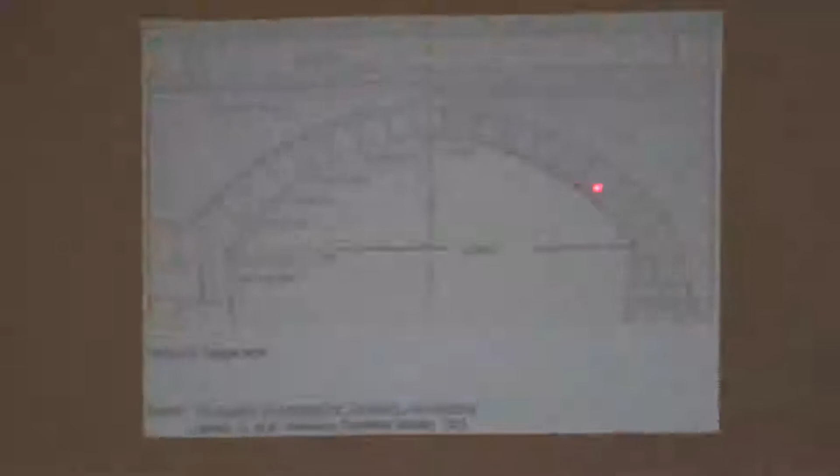And if you look here, you can see that each of these little lines represents the break between two stones in this arch. And you can see that they're pretty much perpendicular to the face underneath. So each one of these allows forces to be transmitted perpendicular to that face along the axis of the arch, and as a result, all the weight that is on here would be pressing down here, out this way, or maybe even this way, depending on the shape of the arch.

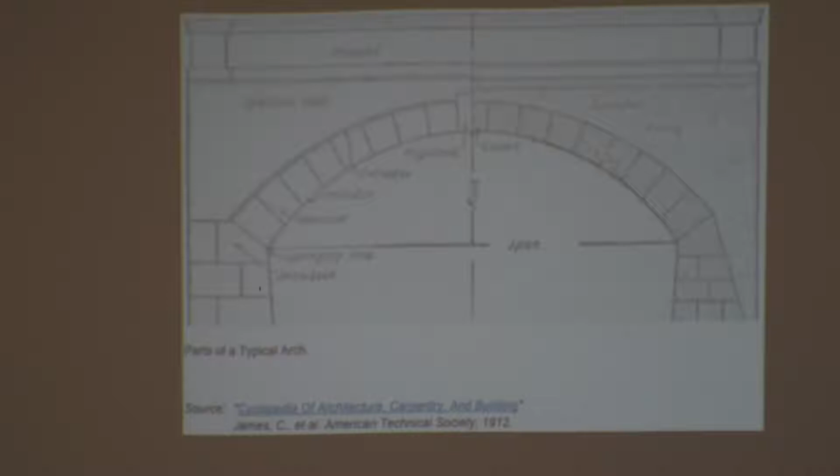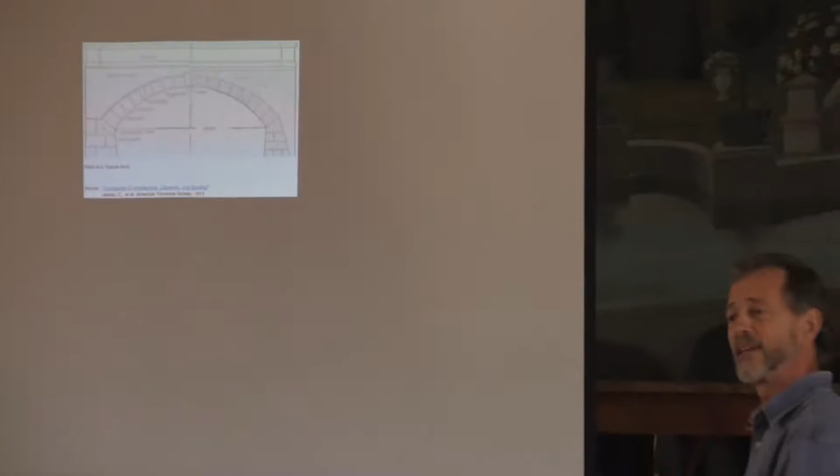The Romans built fully semicircular arches, and the resultant of the forces on those arches push down more than push out. But subsequently, people were able to make the arches shallower by increasing the support out here. So if you have enough mass out here, you can actually make this a shallower arch. And that's exactly how the Follett arches are built. So, any questions on that so far? I'm only going to give you a very brief piece of information here. If you have questions right now about that, I'd be happy to answer them.

And the reason I'm showing these is that there's a difference in the way that the spandrel walls were built. And what is a spandrel wall? Well, these walls here above the arch are called spandrels. In fact, that surface, that plane, over any arch, including those there, those are spandrels. So that term is applicable to any arch.

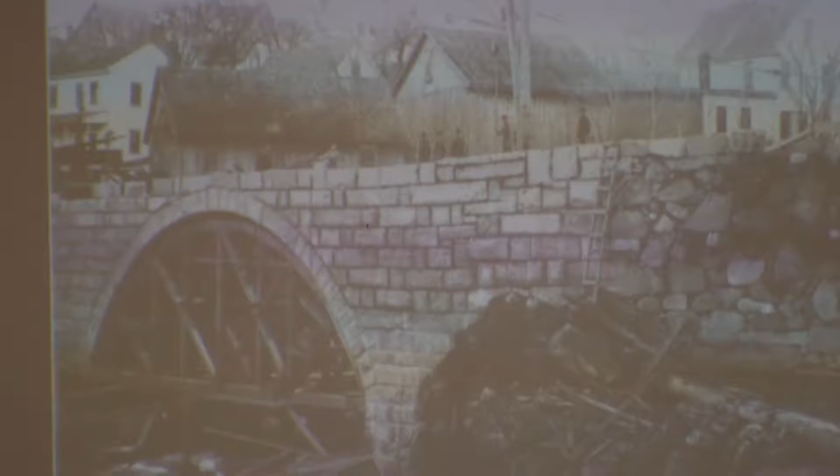So, note here, there is a structure made of wood that was built and set on cribbing underneath. And the stone arch is built over the top of that. And when the arch is complete and has been loaded, this will be removed. And you should end up with something along those lines, hopefully staying. What happened here probably was a washout. There's a weir right behind that arch, and I'll bet that this area here or this area here failed as a result of water pulling on the stone.

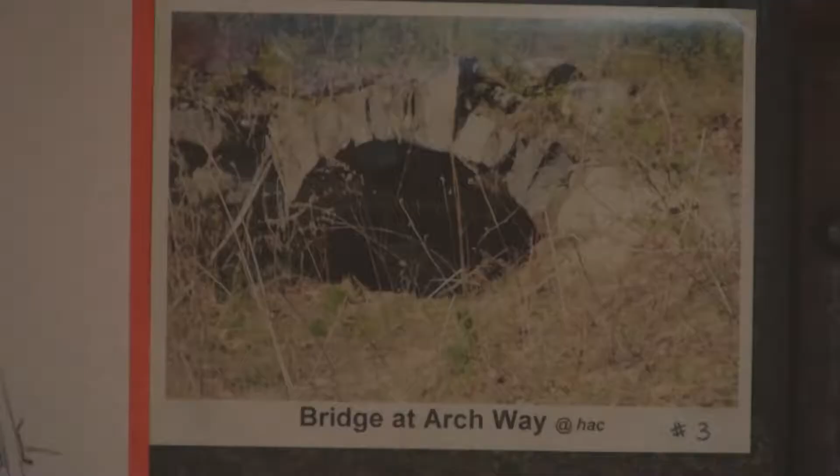What's interesting about this one is that the voussoirs, which incidentally is the name for each of the stones that comprise an arch, are of different sizes. And there's one here that sticks up like a great big fang. Very odd. So that's one side of it. That would have been the upstream side. And this is the downstream side. You can see here, there's a whole collection of odds and ends of scrap metal and junk lying around. It's not the most attractive sight. But with a bit of attention, it could still be part of a nice tour. And it's well worth preserving.

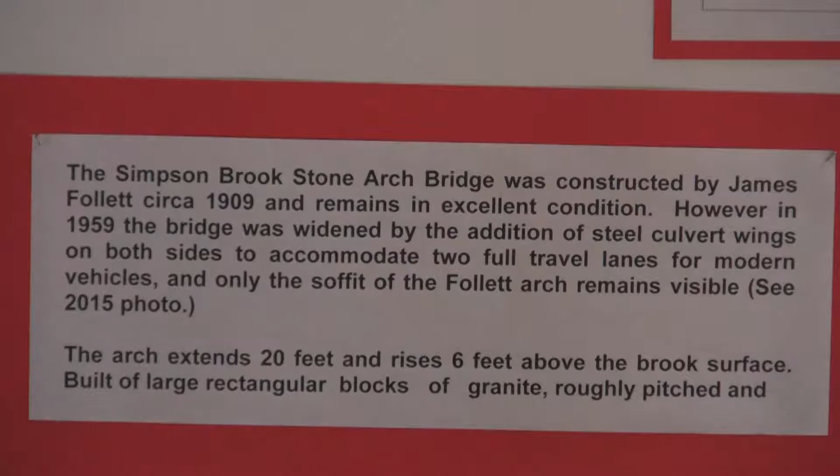This is the Simpson Brook Bridge, or Simpsonville Bridge, on Route 35, just north of here. And there is a parapet, which was mortared. In fact, the whole bridge is mortared. I don't remember when this was built. Does anybody have the date for this bridge? Anyway, it was one of the later ones. And it was built with blocks of cut granite. And here's what it looks like today.

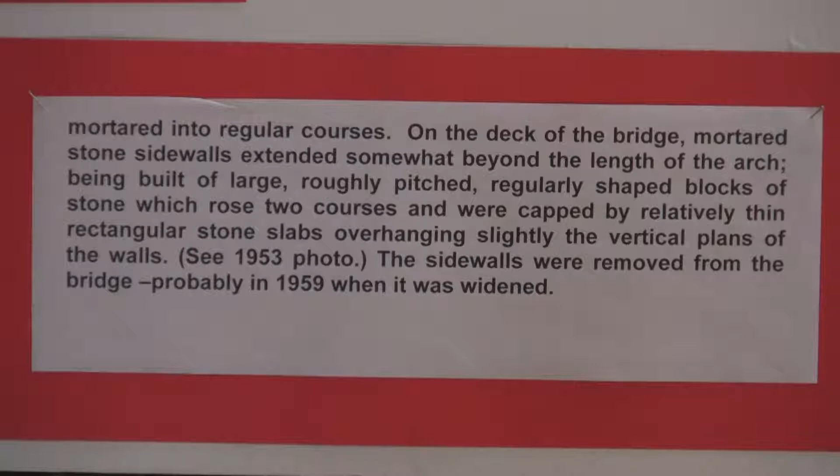Beautifully coursed, beautifully cut stones, and they might have been bedded in mortar, it looks that way, or they might have been mortar pointed after the fact. Either way, the mortar's not doing a whole lot. It's mostly down to the granite and how well constructed that thing is. What I don't know, and I don't think anybody does, is what's underneath, what are the abutments? Is it on bedrock? I'm assuming that it might be, because it's so strong and so stable. And there's been plenty of flood water through there and over the top of it, I would guess.

So that's the Simpson Brook Bridge. Would it be safe to assume that those rocks came up on the railroad from Dummerston? Because they're so evenly cut? I think that's a reasonable assumption. They would have sourced it from the nearest suitable place. And it's a lovely thought, isn't it, that this was from just down the river. Yeah, the railroad was functioning at that time. So, right, there's no reason why. As was the forest. Yep.

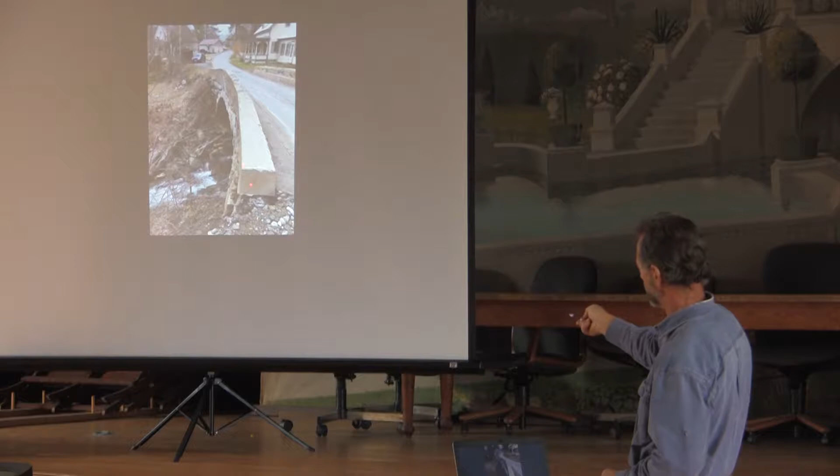Here's where that hole was, where a piece of concrete fell out, right below here. You can see how this is all washed out. There's a big hollow underneath this end of the parapet and underneath the asphalt. And that's what I'm going to be patching over the next couple of weeks or so.

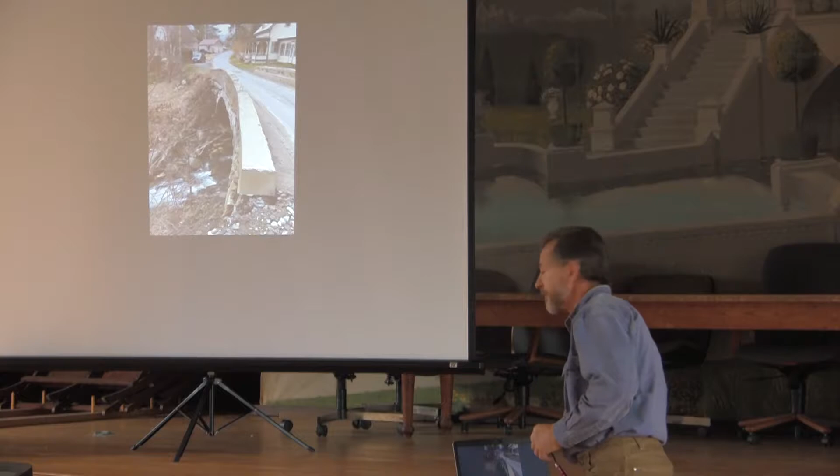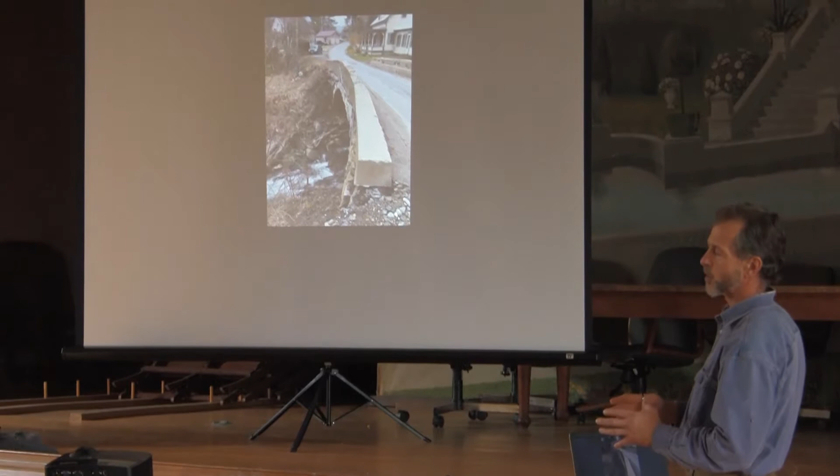And the stone wall is just all covered with cement or with concrete on top of it, on that parapet? So this is poured concrete. This whole thing is poured concrete. And the earliest concrete might be the kind we call rubble concrete, where it's formed and we put in concrete with big rocks in it. And more recently we use steel to reinforce it.

But it's never been a wall. I doubt that there was ever a stone wall atop this bridge. So the stone wall goes up to the roadbed, and that was it, is my guess. And then they poured this. This is a very narrow bridge. It's only wide enough for one vehicle at a time.

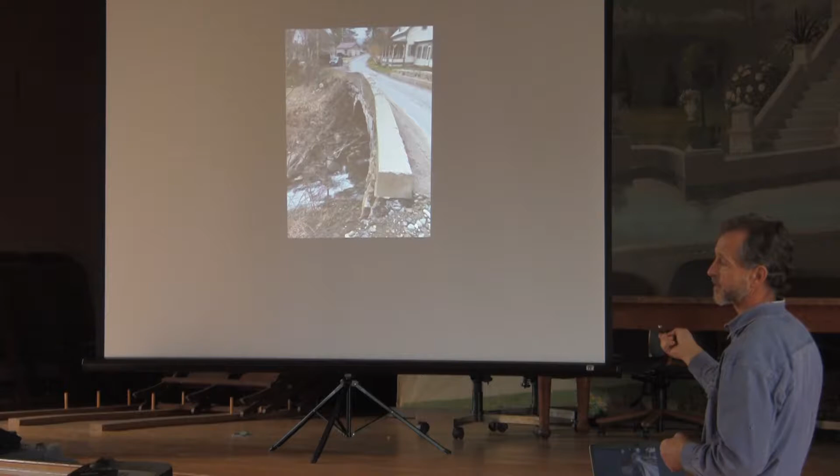There's that hole. Here. So you can see all this stuff that's been added here in an attempt to divert water from this corner, yet it washes out every now and then. And here you can really see how this is potentially going to happen. It's not moving because there's enough weight on it, but who knows how long it will stay that way. There it is.

And what are you patching it with? Dry stone. So when you saw that picture of me earlier with the tire lever in my hand, I was actually just cleaning out this gubbins here down to something that I could work on, which is actually this stone right here, I think is maybe still there. And I started laying stone in there, pieces that reached back, and I will go back very soon and keep doing that until I fill it up to the top here.

Here you can see an attempt to make a repair. I don't know when this dates from. Originally I was thinking I would just do something very similar, maybe a little neater. But then I decided that it would make more sense just to use dry stone rather than messing around with molding. There's a hole here that's just in the concrete. I'm not too concerned about that.